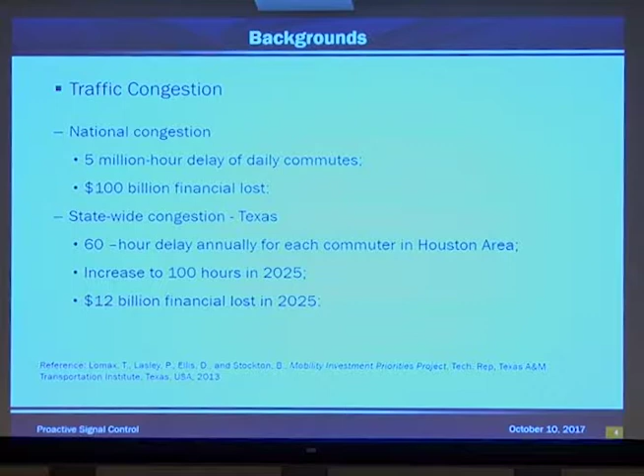For the Houston district, TxDOT operates and maintains over 1,000 signals. At those locations, we operate them either on fixed time, which means the phase sequence and duration of each phase is already predefined, or actuated control, or sometimes we call free operation, where the phase sequence and the interval is dependent upon the detection and the vehicle demand at that intersection.

Where we would like to get to is what I would call proactive control. And this is when the phase at each time interval is assigned to the one with the highest predicted delay based on the short-term predicted timing and traffic volume. Our research objectives was to develop a fully collaborative vehicle signals control system and also optimize the performance of the signalized intersection.

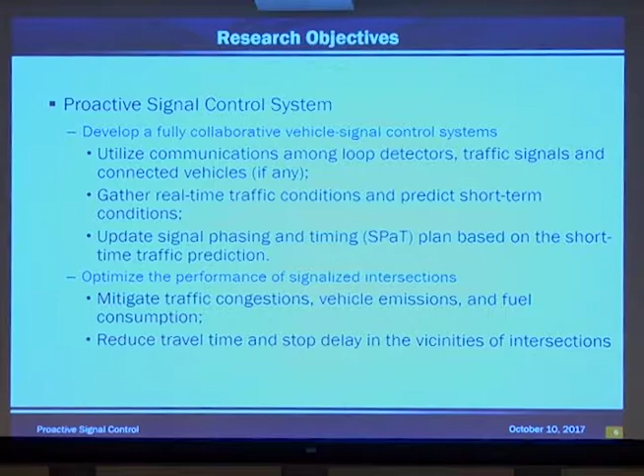Here we see an illustration showing the vehicles at the intersection and the communication that is taking place between the vehicles and signals and the detection.

There's probably a few vehicles that are probably texting with one another or people at home, but we're not going to use them in this particular illustration.

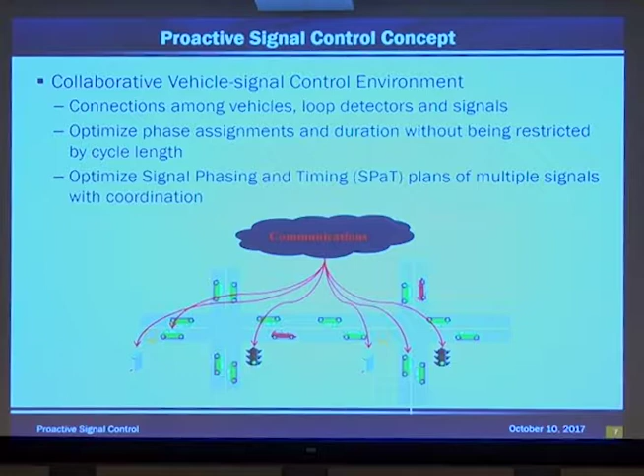What our goal is to optimize the phase assignment and duration without being restricted by the cycle length, and also optimize the signal phasing and timing plans of the multiple signals. Okay, to determine which phase will get the green, what we'll need to do first is calculate the delay at each approach. This equation below shows you how to calculate that delay.

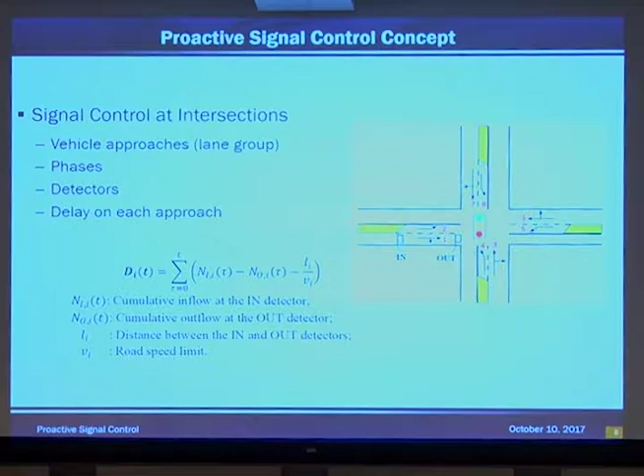Once the delay is calculated at all the approaches of the intersection, now we'll look to select the approach with the highest delay. And utilizing this signal optimization algorithm, we can now look to optimize the signal at this particular intersection.

To see how this will work, we'll start at time interval T. Once the current delay calculations are found, we can start receiving and getting information with the connected vehicles as far as whether the vehicle is within the intersection, the distance it is, and also the miles per hour of that location.

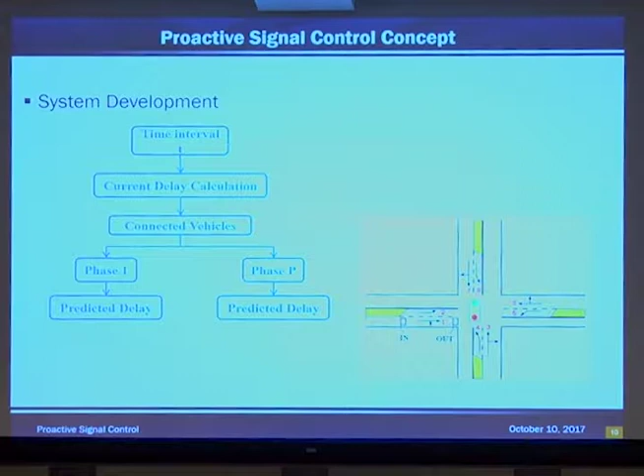Here, we will start calculating the predicted delay at phase 1 of the intersection, going all the way to phase P of the intersection. And based on the approach with the highest delay, that's the one we will look to select first. And now we can start looking at optimal phasing at this particular intersection.

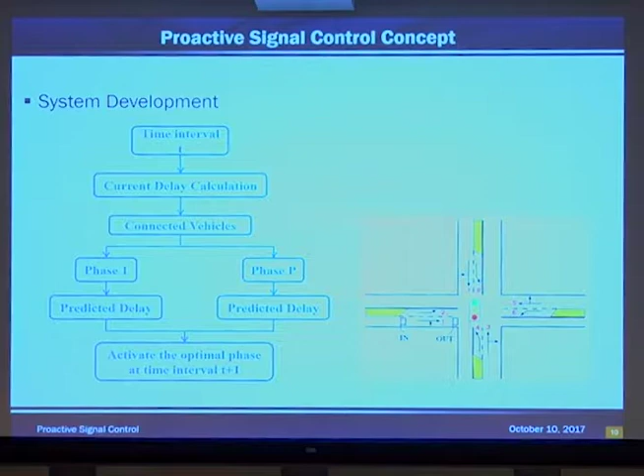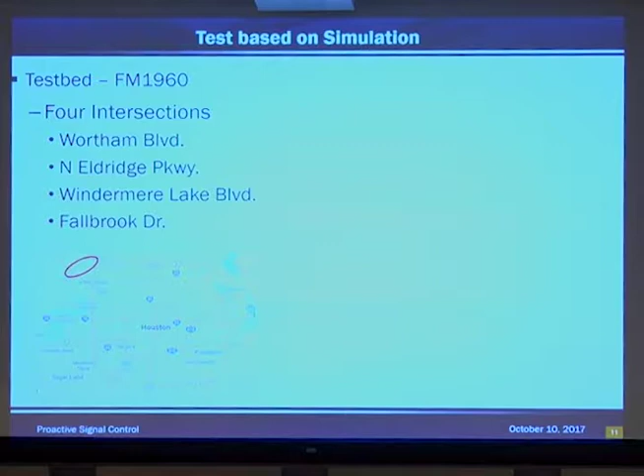To test our simulation on this, we used FM 1960, which is in Northwest Houston. The 4 intersections that were chosen were Wortham Boulevard, North Eldridge Parkway, Windermere Lake, and Fallbrook. The total length of those 4 locations came out to be 7,713 feet, with the posted speed limit of 40 miles per hour. Unless you've driven on it, it could be a little higher.

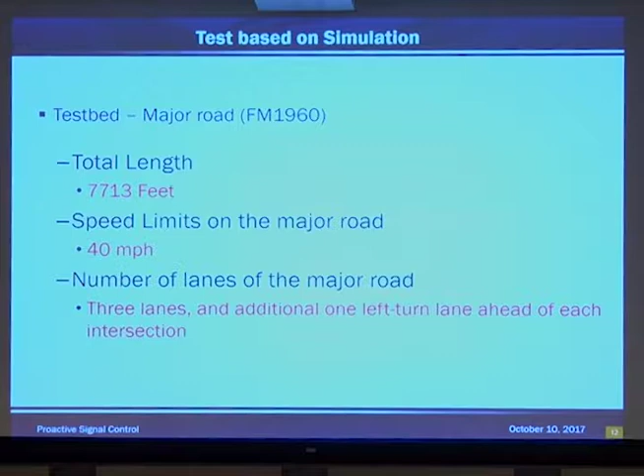The number of lanes on 1960 is 3 lanes each direction for the through movements, and 1 left turn lane in both directions. For the minor road or cross streets, the speed limit varies from 30 miles per hour on Windermere to up to 40 miles per hour on North Eldridge Parkway.

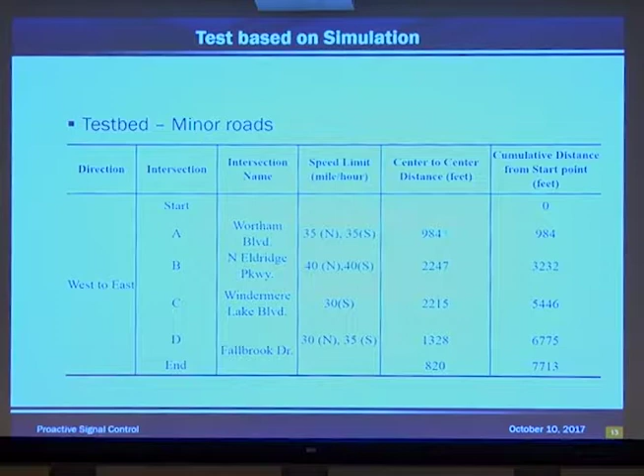All right, just to recap on what we're looking to do. First, we will need to collect the data at the location, needing to know what the geometric properties are. We will also have to have the existing signal plans. Data collection will be needed with the volume and occupancy. Now we can start building and modeling our intersection with our INTEGRATION software, which was provided by our research group, and they will also be using VISSIM.

Comparison was made based on the simulated and observed traffic flow for verification, and now we'll be looking to implement our proactive signal control in our simulation. Once that is done, we can now look to take this out into the field to test.

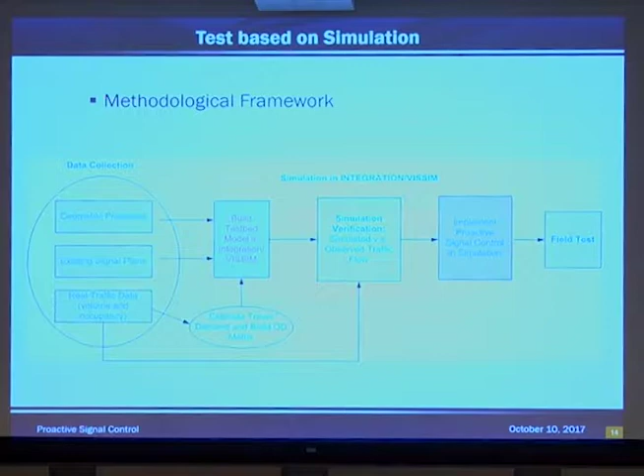Our data collection was performed on April 1st, 2016 through April 7th of 2016. We started our collection at 11 a.m. and continued all the way through 7 p.m. The data was collected from the loop detectors every minute, and we summarized this in 15-minute intervals.

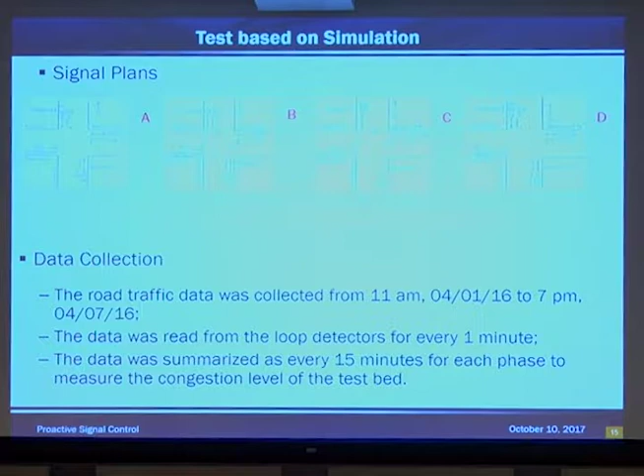Here we see the hourly volume for phase 5, which is the left turn movement on Eldridge Parkway. As you can see, at the top of the graph, it shows that the vehicles per hour was at 120 vehicles per hour, which is during our PM peak periods, and as low as 20 in our off-peak periods, which was after midnight.

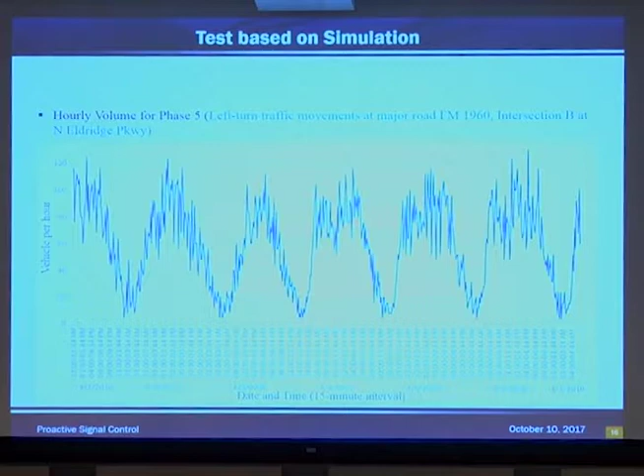We're also looking at the same location for our occupancy on phase 5, which was the left turn movement, and it compares the same with the vehicles per hour. Our occupancy shows at 90% during our PM peak periods and drops down below 10 in our off-peak periods.

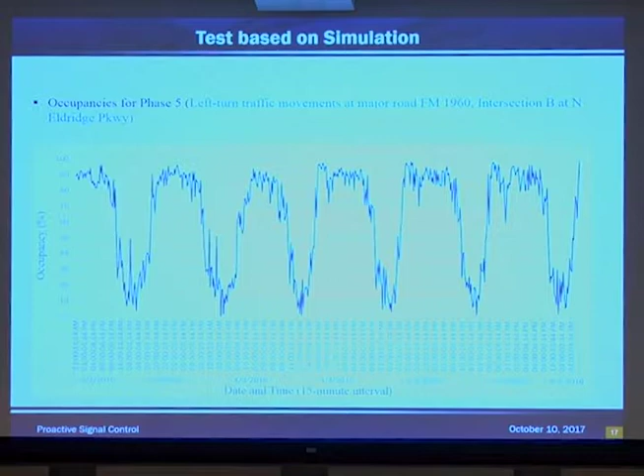Good afternoon. So once we gather all these data, what we do with this data is kind of critical. So what we did is we ran the data through a simulation, basically INTEGRATION and the VISSIM simulation, and we try to see if our simulation can match our field data. Because that becomes critical: if your simulation is 100% correct to your field data, basically you can predict the traffic, because you know exactly when your volume picks up and when it drops. So this is one of the directions we're testing on.

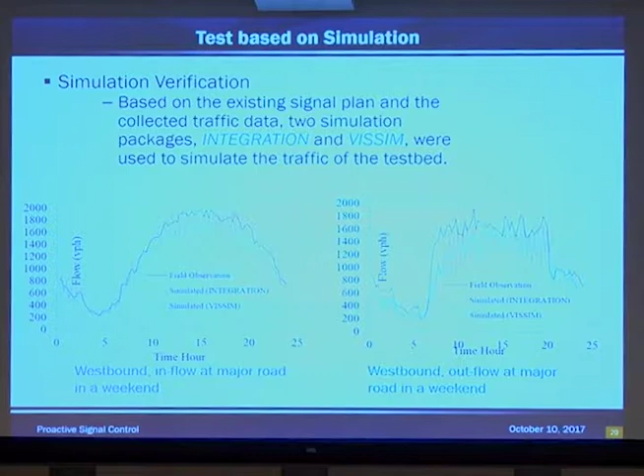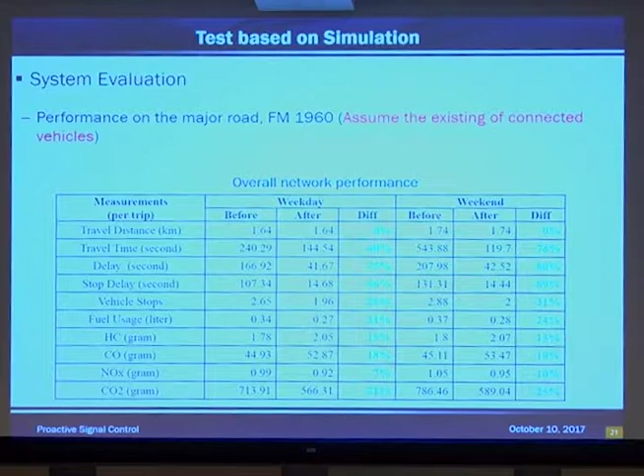So once you have the equation or the simulation for the modeling, you crank that into an algorithm, basically the proactive algorithm, and you'll calculate how much benefit you'll get based on what the algorithm is predicting. And this is what the system shows you: okay, this is how much I would be saving as to the time delay and stop delay and all the benefit you get from the proactive system.

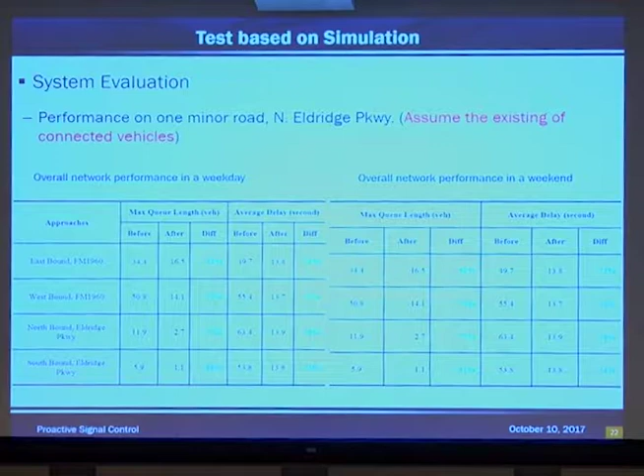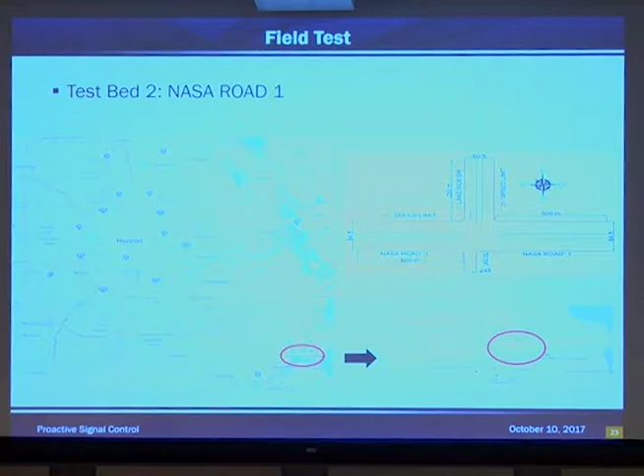Okay, so what we're going to do is put it in one test location for the actual testing, because all of the previous ones are just theoretical values. It's not the actual value we implement in the field. So we've got to test in an actual field location. The field location we picked is a NASA Road 1 location, a small location, because we don't want to have too much impact to the traffic in case this thing didn't go as well as we planned. So we picked a location a little bit more remote to test.

And this location has 4 approaches or 5 phases. And we have stop bar detection and then a couple of advanced detection or setback detection.

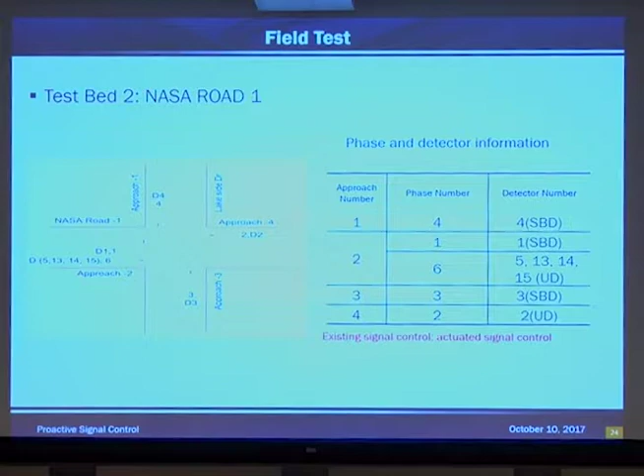And what we want to look for is how we evaluate the system. We try to look for the benefit of volume. Do we increase the volume flow or also complaints? That's how the two measurements we try to accomplish.

So what we're looking for, since there's a limitation in what we can do with the controller, it's not as advanced as where we wish it could be. So basically we just pick two variables we think we can use. One's the volume, one's occupancy. And the value is selected by, I provide them data for about a whole week worth of data, and they crunch it through the algorithm and created some sort of volume and occupancy that's critical to the intersection, where I need to watch out for.

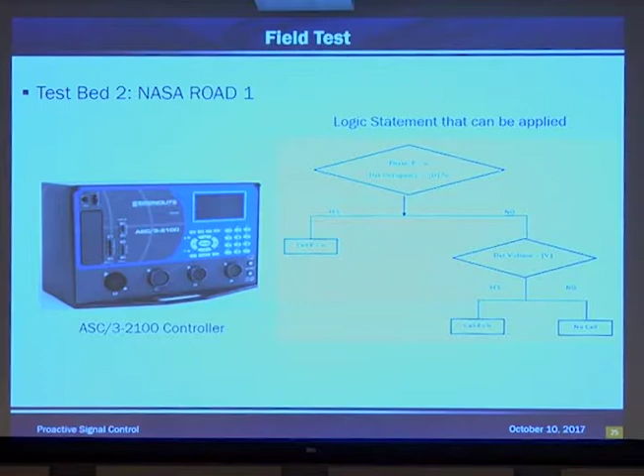So basically, we just program that into our controller. So we'll create some sort of logic statement in our controller to obey this rule, but we apply it to all approaches. So we don't know which approach has more volume or occupancy than the other approach. So each approach can override each other based on its demand and occupancy.

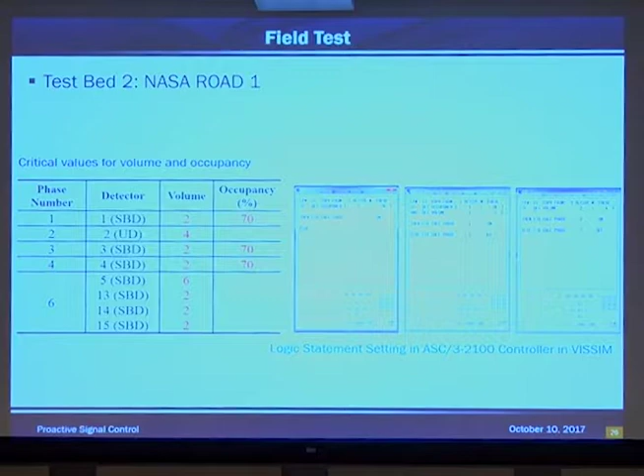And all the numbers shown in red, the volume and occupancy, are all calculated through the algorithm software. And we changed a couple of parameters. Part of it is the min time, the max time, and also the vehicle extension time. These are very basic parameters we change in the controller.

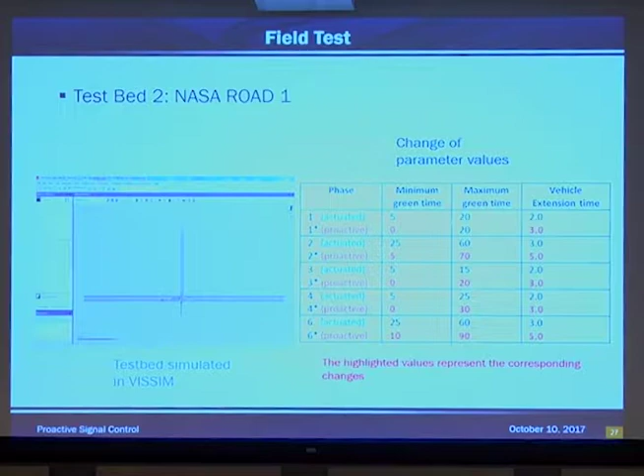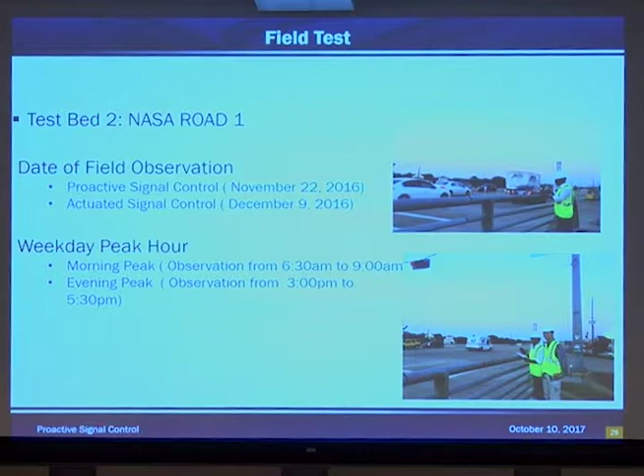And these are the researchers. The taller guy, he's Dr. Hao. He's one of the principal investigators for the research, and the other one is his grad student. So what we did at the site is that before we turn on for actual data collection, we let them fine tune the volume and occupancy for about a two-week period before we actually go out there collecting data. So the actual data collection days are two days. November 22nd, we have the system turned on, and then December 9th, we turn the system off. So we can do a comparison between the two data sets.

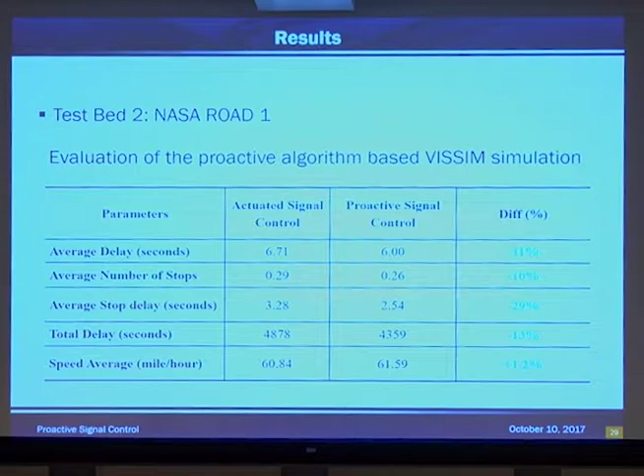So based on our experiment, based on our data collected or observation, it calculated that we have quite a lot of benefit out of this system. We reduce delay by 11%, stop delay about 29%, and total delay about 13%. And we also increase average speed a little bit. So how does that translate? That just gave you some general idea.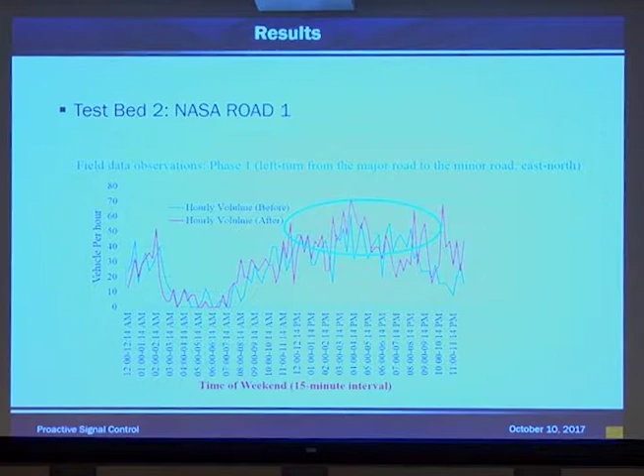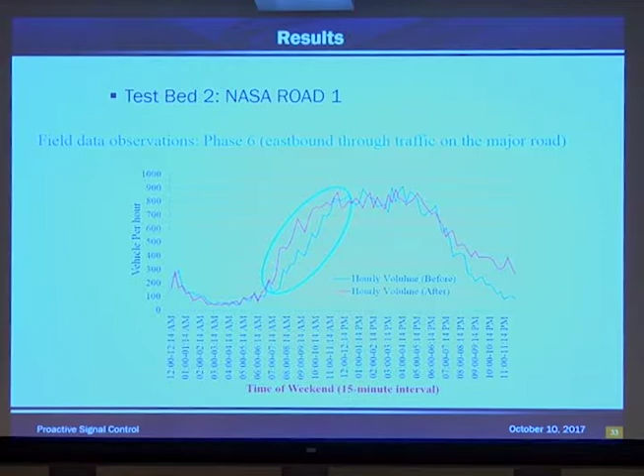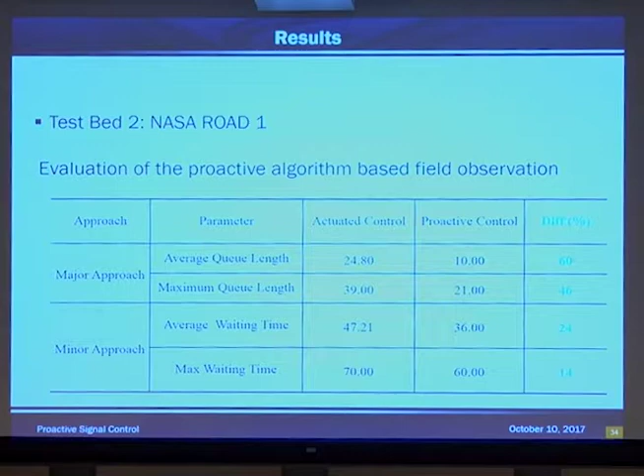And overall, if we can operate this as a 100% proactive signal, we actually can get a lot of benefit out of this system. We can reduce the delay, and also the air quality can be improved. And the field test shows a lot of good improvement. And since we deployed this location, we haven't heard any complaint from anybody. So to me, that's good feedback, because typically you get a lot of complaints from people if you've got a system that's not doing correctly.

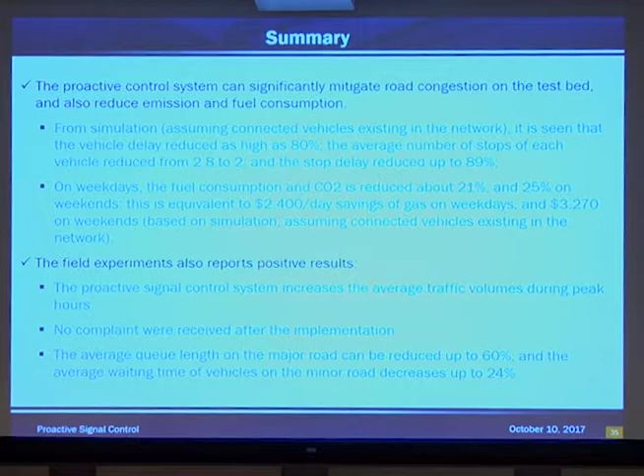And we also see a lot of reduction in the waiting time, the delay time. And this is just one general location, so this does not represent the whole system. So what we're going to do right now, in phase 2 of the implementation, is 30 more intersections. This corridor, these 30 intersections, are a little bit more different. We're going to test more different criteria now. Basically, we're going to test different traffic volume, different types of detection systems, different driver behavior, coordinated or free, and some of these locations are diamond intersections.

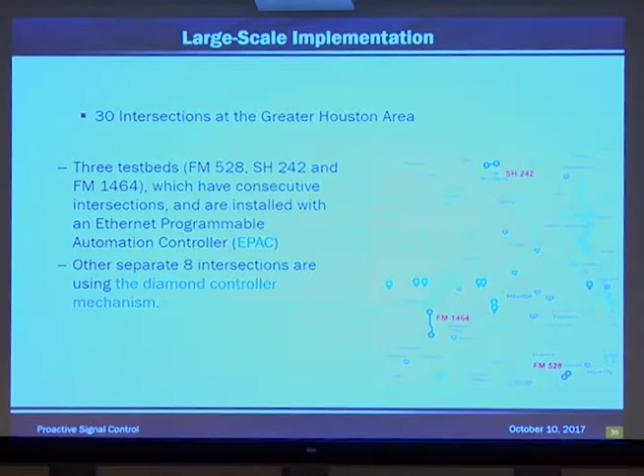From our preliminary data from FM528, we already deployed the FM528 system. That location has 3 intersections. The spacing for that intersection is a little bit unique, because it's coordinated during the AM peak and PM peak, but it's operating free during the non-peak hour. So we want to see what kind of feedback this system gives us.

Based on our earlier data collection, we found out that free operations sometimes work better than coordinated periods. Because when you run it fully coordinated, you will not allow the system to do what it needs to accomplish. So what we're going to do right now is modify our algorithm a little bit. We're going to try to figure out how we can drop the intersection back to free operation when it needs to, and go back to coordination when it needs to.

Right now, we're still crunching all this data, and hopefully we can automate that to a certain extent. Our goal is to find some way to program that entire algorithm into a controller, because you always have cause and effect. Every time you change your volume or occupancy in the logic statement, it'll affect your outcome for the next cycle.

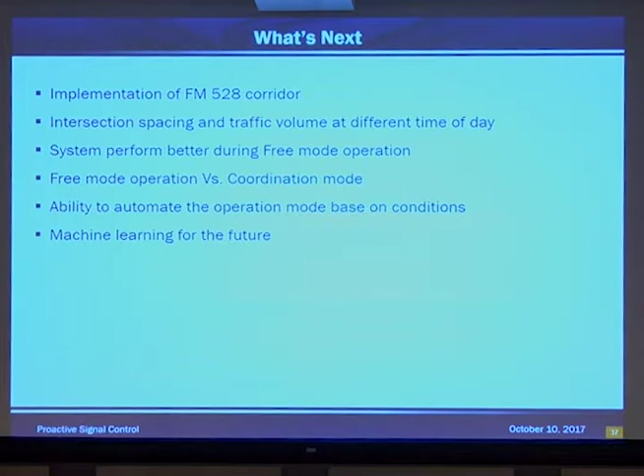Yes. Just one quick comment. I guess in your study, you mentioned you're using the predicted delay as a criteria to assign the green time, and you also... Okay, I guess I just have a quick comment. Man, I forgot what I said.

Anyway, you developed an algorithm using predictive delay to assign green time in a connected vehicle environment. Basically, the controller knows all the vehicles in the intersection, so it can easily achieve your algorithm. But for example, if we have perfect detection, like a stop bar plus all the detection in the approach, it would achieve, I would say, the same results.